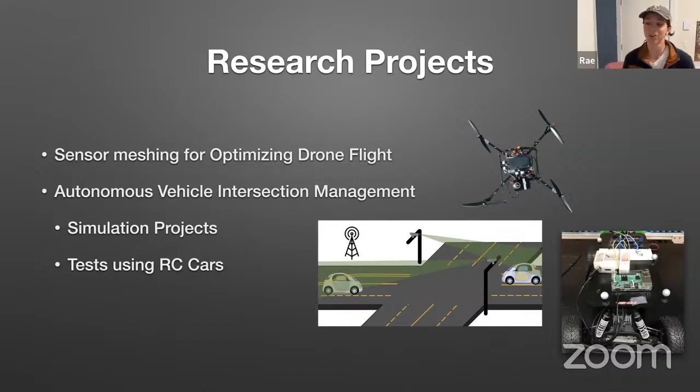Anyway, that's me. Today, just to get things rolling here, I wanted to talk about some research projects that hopefully folks might find interesting. The first research project I'm going to touch upon is sensor meshing for optimizing drone flight. The second research topic is the autonomous vehicle intersection management problem, with both simulation and actual physical testing in the real world using RC cars in the latter project.

So I've thrown this word around now, and you might be wondering, what is a cyber physical system? Well, you all have gotten to work on them all through the year, we see them every day. It's basically a system that contains both hardware and software components, and oftentimes it requires real-time requirements, so you have to actually have feedback into what is going on in the real world. Practically speaking, when implementing or using cyber physical systems, there are usually two phases to rolling out a solution to a problem: the first is via simulation, and then actually being able to use real world systems to model or even end-to-end prove out your cyber physical solution.

One of the first system examples I mentioned previously, which now we get to dive into, is this unmanned aerial vehicle, basically a hobbyist drone vehicle. What we were posed with as our research question was whether or not we can improve flight accuracy using sensor redundancies. By sensor redundancies, we mean sensors that might do the same thing but come up with slightly different results, and can we use all of these different inputs in order to make our flight even better?

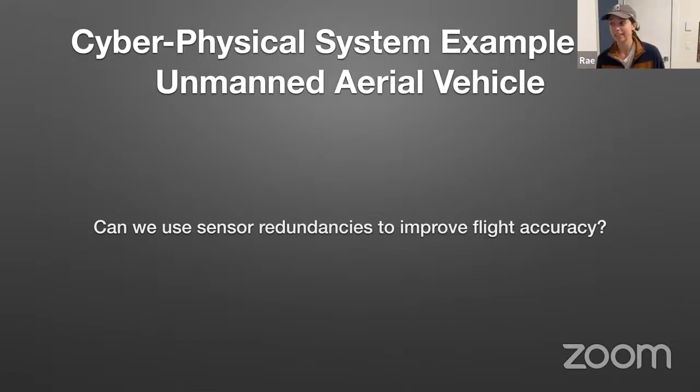Maybe to kick things off, why don't we start with a brief little exercise? Maybe we can all come up with a couple of sensors that we think would be useful to build redundancies into a drone or even an airplane. I don't know if people want to come off mute and maybe shout some stuff out.

GPS? GPS, that's awesome, yeah. LiDAR for crash stuff? Yeah, LiDAR, that's a good one. Barometer? Yeah, these are great. IMU? Yeah, that's a really good one. Anyone else want to take a stab? Somehow detect if one of the rotors is failing? Yeah, like error detection. These are awesome. Anyone else?

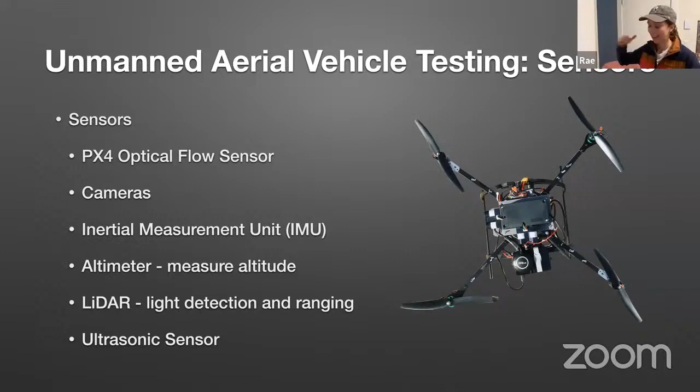So this is what we went ahead with for our sensor meshing, and our base proposal was trying to do: can we just get this to fly across grass at a consistent height, in kind of a U formation? And what ended up happening was this.

And that's why we thought we had all these sensor redundancies, but at the end of the day, it just didn't end up working out.

There could be a variety of different reasons here. It could be that our sensor meshing, or this kind of weighted algorithm, wasn't properly refined. A weighted algorithm is a way for you to take multiple inputs from one position, like altitude. You could use an altimeter and then an ultrasonic sensor pointed directly at the ground. One might be saying it's 3 meters, one might be saying it's 2.5 meters, and you take the average between them and say, okay, the altitude's 2.75, for example.

So it could be that we were saying this sensor is more important than this other sensor, and that was incorrect, or that some data points needed to be thrown out. It could even tie back into this idea that a cyber physical system is so real time that maybe even our data points were out of date on some of the readings we got, so we were just meshing completely with the wrong data.

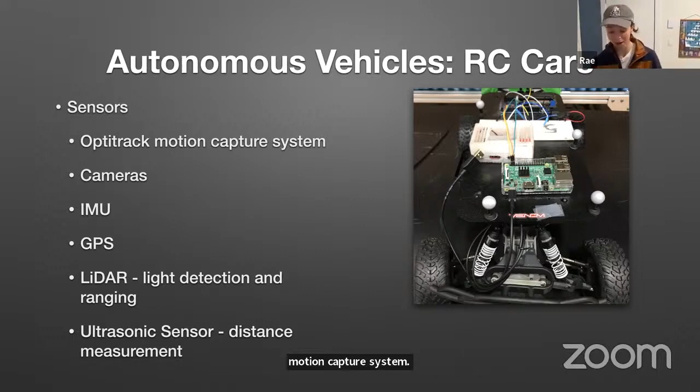So I don't know if there's any gamers in this room, but the OptiTrack motion capture system is how they create video games, where they basically put a bunch of markers, trackers all over people, and use that to help model the physics of the game. We kind of abused that system and said, what if we used this as our intersection that knows all about the cars, communicates with these cars, and knows their exact positioning.

So we used it to determine the exact positioning of where these cars were. Highlighted here are the actual markers that you have on each individual car, and this is what the system tracks. The OptiTrack cameras track these markers so that the system has exact positioning of these cars. And so that's what we primarily used for our positioning.

So we went through a couple iterations of hardware testing. This was still a new system to us. How do we send it coordinates so that it knows the exact place the car is supposed to be? This requires not only the onboard sensor inputs from the car itself, but also the exact positioning from the OptiTrack motion capture system. So we had to find a way to ensure that the position the OptiTrack system was sending would go back into the car, and the car would know, okay, I'm here and I need to get here. And how do I get there? And what's the safe route to get there?

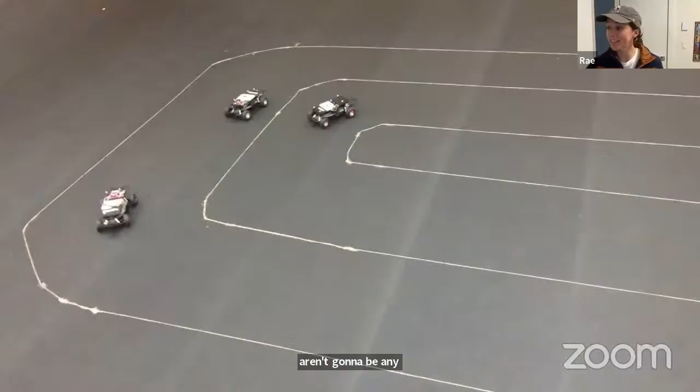And so we went ahead, and this is the cars running around the track, kind of more testing.

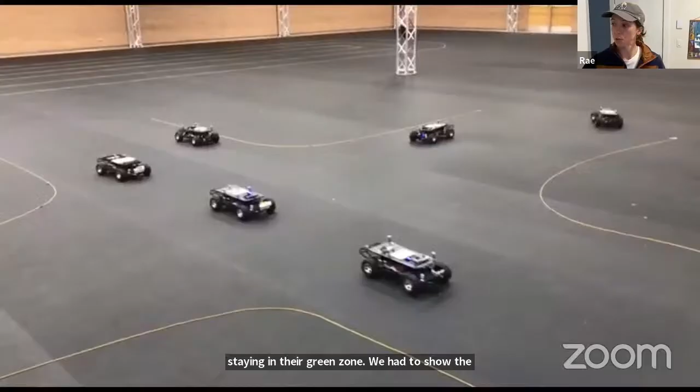Once we had shown the reliability of everyone staying in their green zone, we had to show the robustness of this by actually modeling the intersection. So to model the intersection, again, we used RC cars, all of the normal setup that I had mentioned earlier. What you see here is kind of those green zones applied to the intersection. So each of these cars is going through the intersection, talking to the intersection manager that's saying it is safe for you to go through the intersection. You've requested that you're going to turn left or right, whatever it is, and here's how we're going to schedule you such that you don't hit anyone else in the intersection.

This is your green zone. You've told me your green zone, so I know exactly what will cause an accident, I know what won't cause an accident. And so this is your scheduled time, this is how long you have to get through it.

Is the promise of this to reduce traffic? Yes, reduce traffic. It's also in a fully autonomous system, so this is where every single car in the intersection is fully autonomous, has full capability of talking to everyone.

There's different philosophies of how this is approached. One is more of a centralized approach where you talk to someone who knows the scheduling of everyone going through the intersection and can schedule you. This would be what's typically called a client-server model. There's also a peer-to-peer model, where all of the cars talk to each other and schedule through an intersection. So this would be, I need to talk to 10 other entities to understand how I'm going to traverse this intersection. It's a little forward thinking in terms of its research impact, in that we're not close to a fully autonomous system. But posing these questions earlier on is hopefully going to help us understand how we're going to see future progress. So proving out both the cooperative system and the client-server system, where you're talking to one centralized system that knows exactly where everyone's positioning is, are just two separate approaches to this problem.

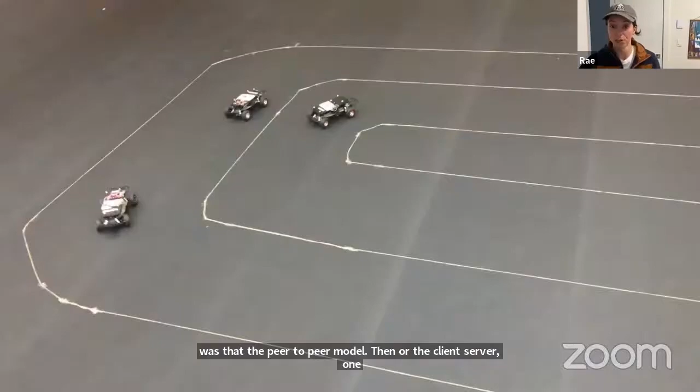So was that the peer-to-peer model then, or the client-server one? This one is a client-server one. So this is one where you talk to an intersection manager. The intersection manager is that server that knows everyone's green zone, and is able to traverse intersections and tell cars how to do so based on whatever their request is—maybe they want to turn left, right, or straight. The intersection manager can say, go this velocity at this time, and I guarantee you won't hit anyone.

Okay, so if I'm understanding this correctly, we have a server that is controlling everything. Every car has a buffer, the yellow zone, for any latency in requests, I'm assuming? Mm-hmm. And they just maintain their green square, is that it? And the green square just moves around? Okay. Yeah, exactly.

So I have one question here, really—technically, how frequent are the cars sending signals back to the server? It would all depend on the level of traffic, right? So in simulation, we can get this up to highway speeds of like 70 miles per hour, traversing a 5-lane intersection, for example, going one way. And how that scales compared to even just normal traffic light systems.

I guess the main benefit of an intersection manager, and generally a fully autonomous system, compared to what we have today, would be that you can have cars going every direction without red, green, yellows, because the intersection manager can say it is safe for you to go straight right now at this speed at this time, because I know exactly what all of the other cars are doing in the system, and I know that it's safe for you to go. It basically acts as its own police. I'm getting off track a little bit—did that answer your question?

So it does, and this is also kind of somewhat the drawback of we just had all of the cars go through the intersection and loop back around, which almost creates a queue of cars waiting in line to go back through the intersection. So by having all of the cars turn in one direction, you have everyone come back around the same direction, and it hurts their latencies, right? And makes stoppages happen as they go through the intersection as well.

So all of these things to say, think about your simulations, even your real world ones, because it still doesn't perfectly model your system.

Are there any other questions? Well, with that, I leave you with just a handful more learnings. There is a question in the chat.

How much does it cost, this system in total? So we were lucky in that we had access to this OptiTrack system, which alone is a very expensive system to have. The cars themselves, though, each one of them's like maybe 50 to 100 dollars. So as you create more, this of course gets cheaper and cheaper, which is kind of nice.

So it's really a cheap simulation compared to all of the vehicles that we would have had to outfit with all of this sensing technology, as well as coming up with how we're going to actually have an intersection in real life that all of these cars can just traverse every single day. That land alone and the land allotment would be kind of difficult. So it's within means for a graduate student, but by no means is it still cheap, because of this OptiTrack system particularly.

For that OptiTrack system, why -- because in FTC robotics they usually install odometry wheels on robots and track each robot, right? Why use this OptiTrack system? And the second question is, for that system, how often can it refresh and detect the car's position? Like is it every second or every 0.1 second that it can detect the position accurately?

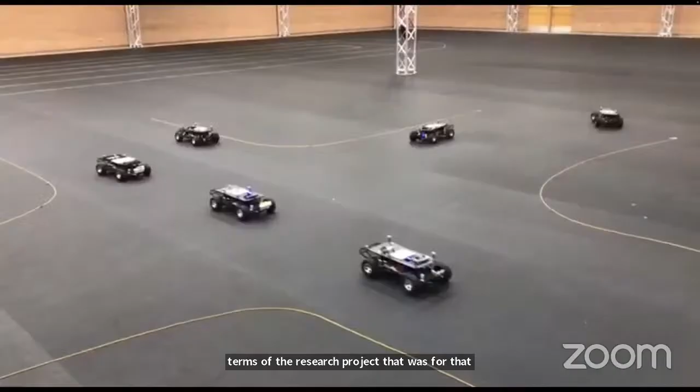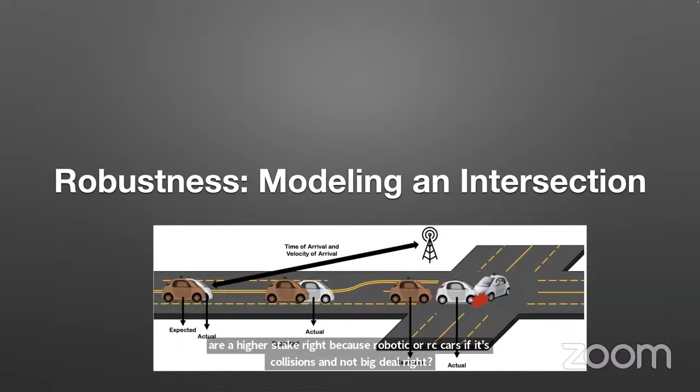We actually still have a question here. We're starting with RC cars traversing through intersections. For that specific research project, were there any follow-up efforts to bring this to a more physical, real-world scale, not real cars, but larger things at higher stakes? Because with robotic RC cars, if there's a collision, it's not a big deal. Is there anything that goes beyond that, a little more serious?

Definitely. This is by no means us saying it's all wrapped up and solved, but more of a building step—we've proved this out in simulation, we've proved it on a non-jeopardizing system. Where else can we put this? There's actually, ironically, a small fleet of autonomous buses in Michigan that my particular lab is partnering with at this moment. They've reserved an intersection in a tiny town in Michigan and are building out this solution. So slightly higher stakes—still don't want to crash the buses, but building up to that real world problem.

Going back to the client-server versus peer-to-peer model, there's also a good amount of research being done in the peer-to-peer space, because the feasibility of saying there's going to be, at every single intersection, an all-knowing server that knows positioning and can help you go through isn't really feasible either. That's where the feasibility of cooperative vehicles—talking to everyone going through the intersection and making sure you don't run into any of your friends—is really powerful. My lab, as well as other labs, are investigating more of this cooperative, peer-to-peer approach of cars talking to each other.